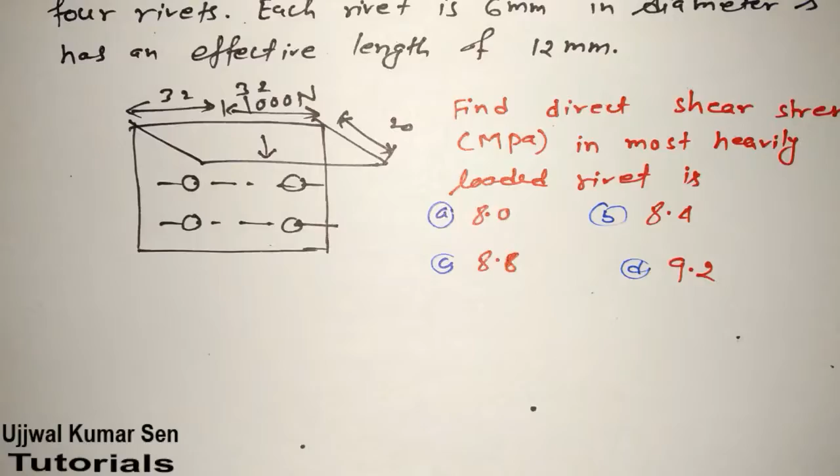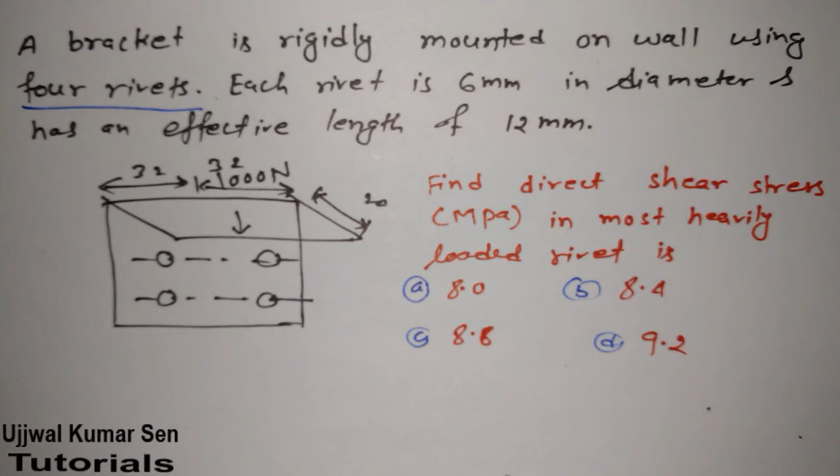This question was already asked in GATE previous year. If you are preparing for GATE or any upcoming examination, riveted joints is one of the important joints in machine design. In welding and machine designing, don't forget to study two topics: riveted joint and fillet joints. Both are very important.

I have already shared videos related to fillet joints, which has also been asked in GATE questions. Now in this tutorial, I'm going to share with you exactly how to solve this question. Let's go for it.

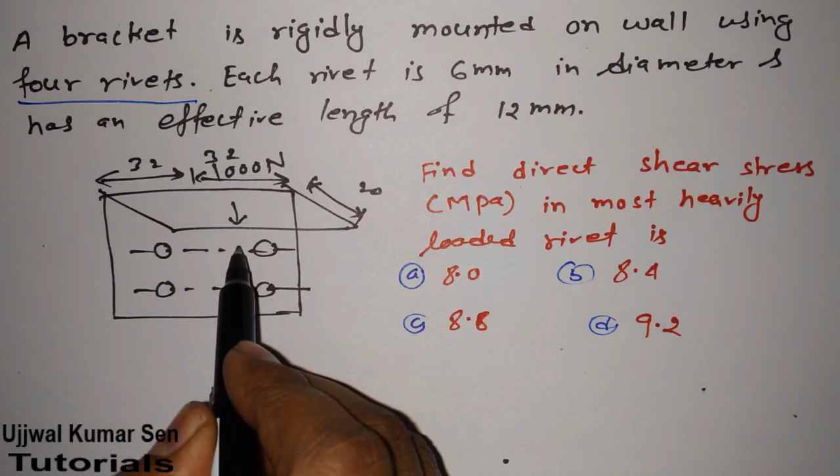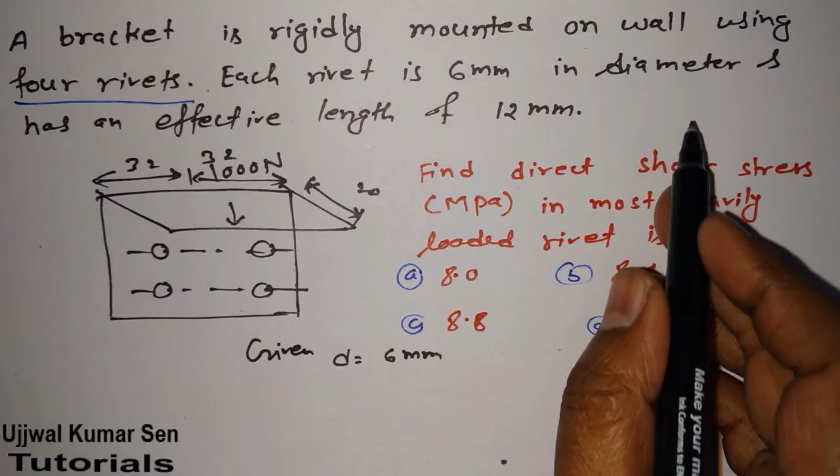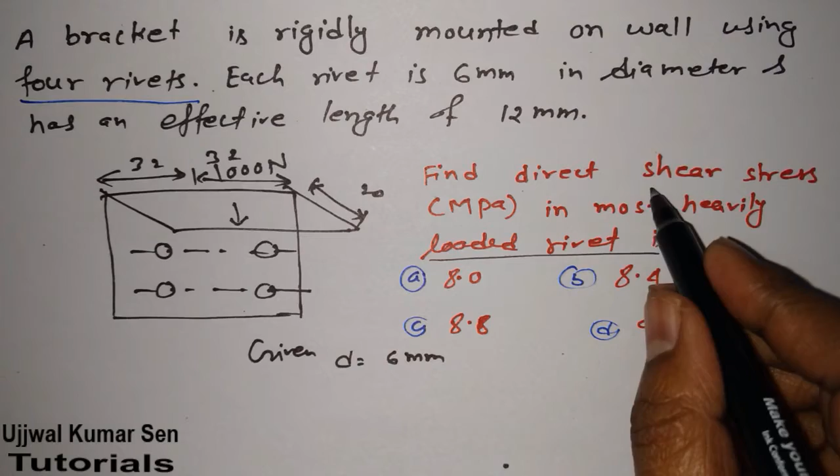Now what they have asked: a bracket is rigidly mounted on a wall using 4 rivets. Suppose this is a bracket mounted on the wall using 4 rivets, and each rivet diameter is 6 mm. We have to find the direct shear stress in the most heavily loaded rivet, in megapascal.

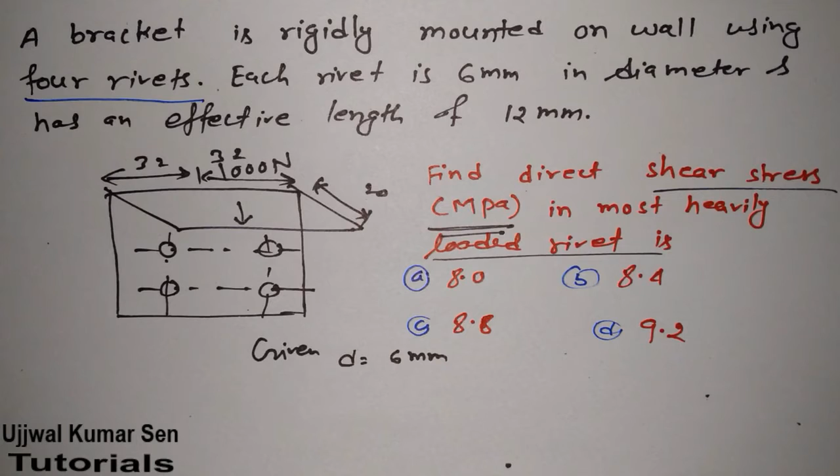Now if we have this combination, that means all these riveted joints are taking the same load, and their dimension is the same, meaning the diameter of the rivet is same. That means all of them have the same shear stress. Are you getting my point? So if I calculate shear stress for one, that gives the most heavily loaded rivet.

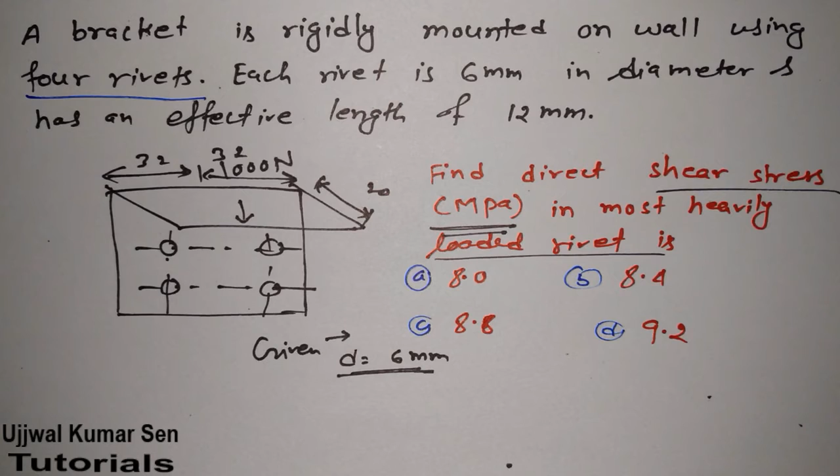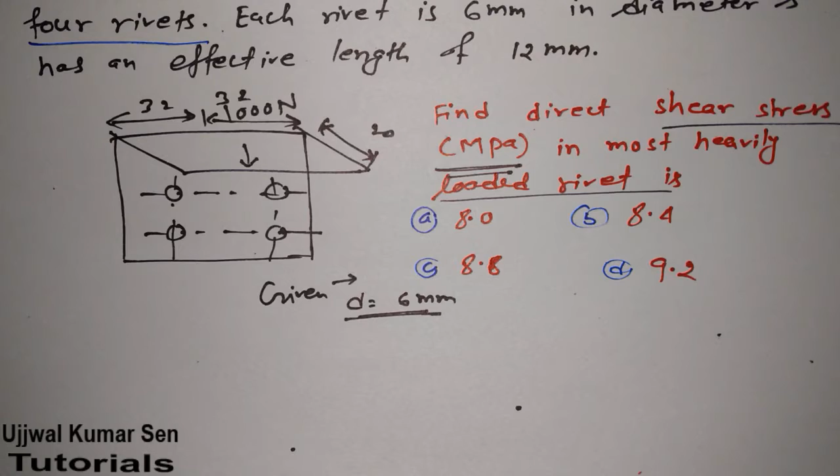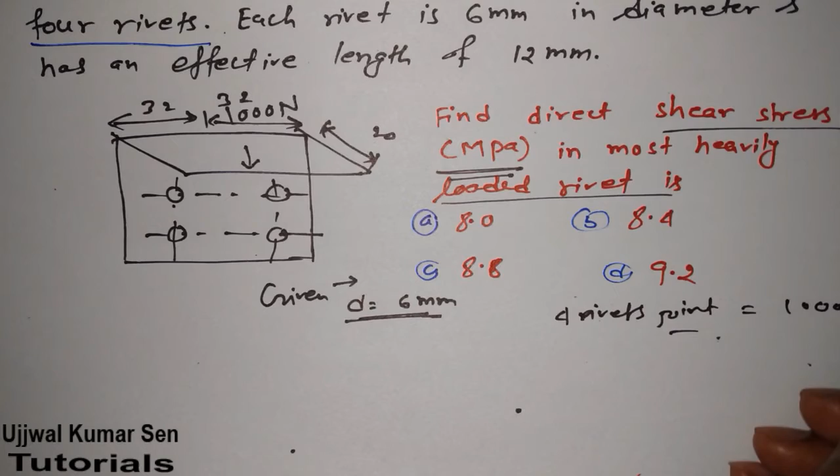Because the total load acting on this wall is 1000 Newton, and we have 4 riveted joints, so total load bearing is 1000 Newton. So each rivet joint's loading capacity, load would be 1000 divided by 4, equal to 250 Newton.

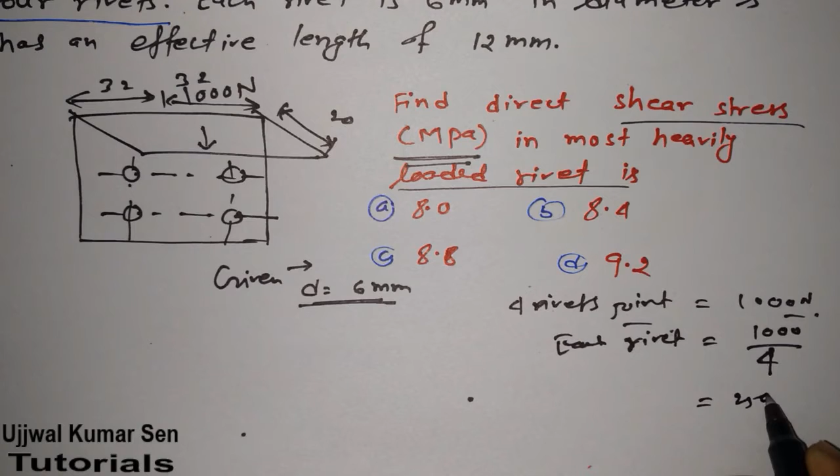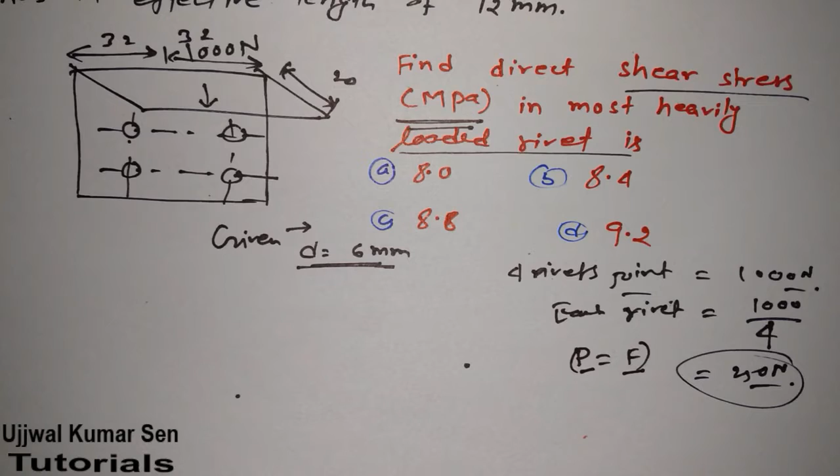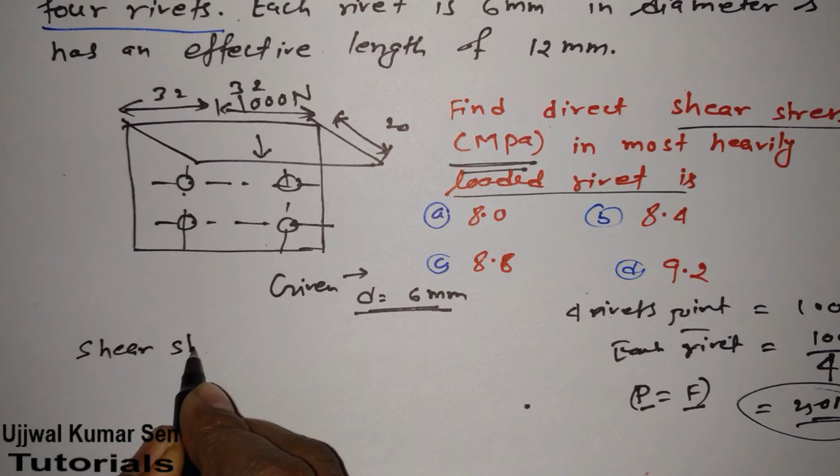Now as you know, what we basically have to find out: 250 Newton we got, that is load, some books denote it by P, some by F. I don't know which book you refer, that's why I'm sharing both. Now if we got load, we can easily find shear stress. Shear stress equals force upon area, so 250 upon area. Now how much area is here?

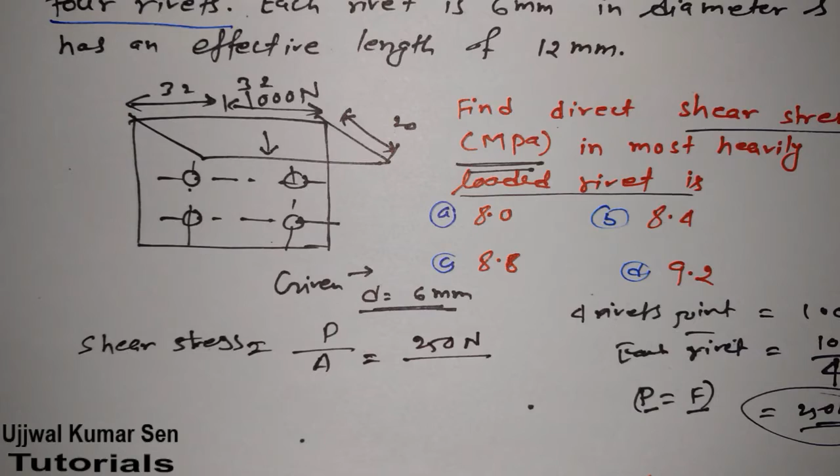Total area would be for a circular section. If diameter of this rivet is 6 mm, area for a circle is pi by 4 d square. We know this. Then we divide force by this area, so 250 divided by pi by 4 multiplied by d square.

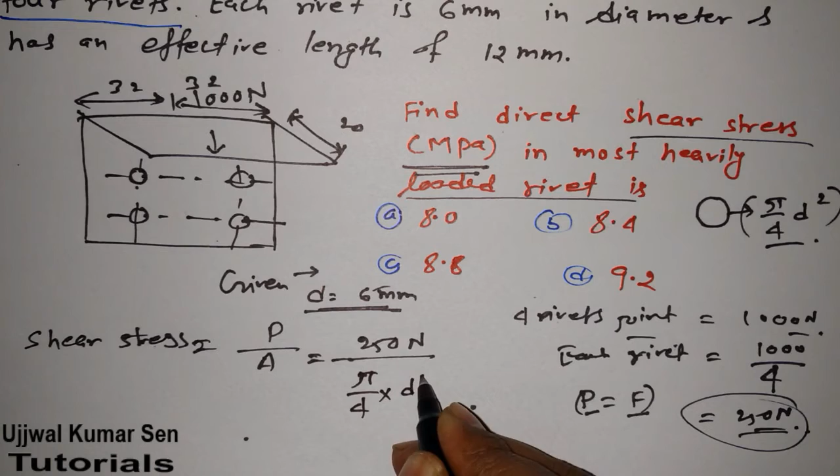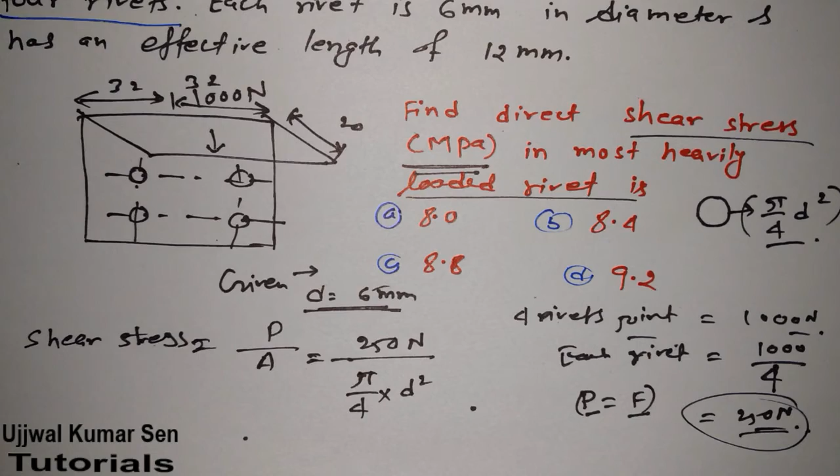This is a simple example of a riveted joint, but in case of riveted joints we can get much tougher questions. This is a simple question, my dear. I will share with you in upcoming videos how to solve those tough questions, which will be helpful for you too. But in this tutorial, I'm sharing this simple question. We'll start from simple and later I'll try to share the difficult ones too.

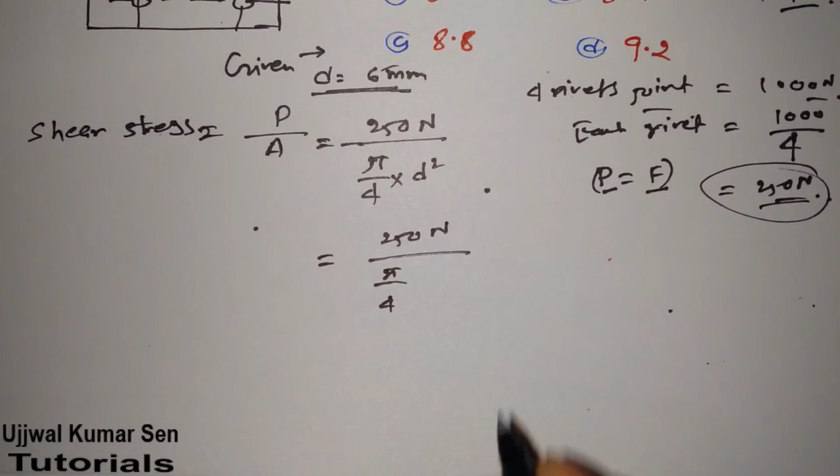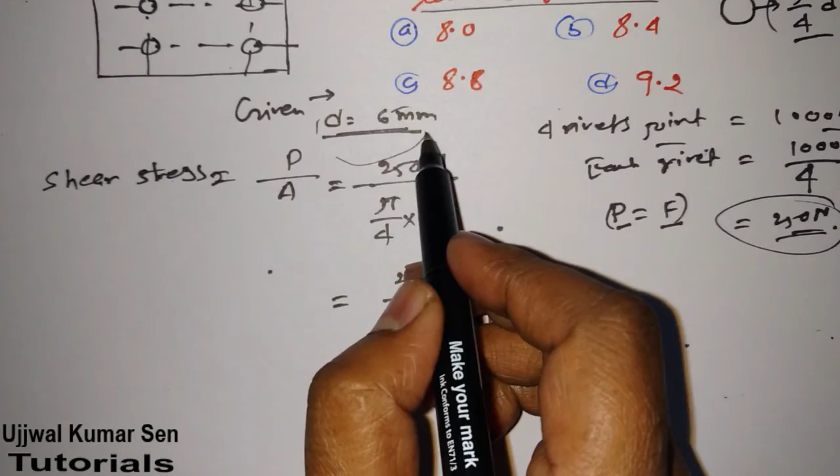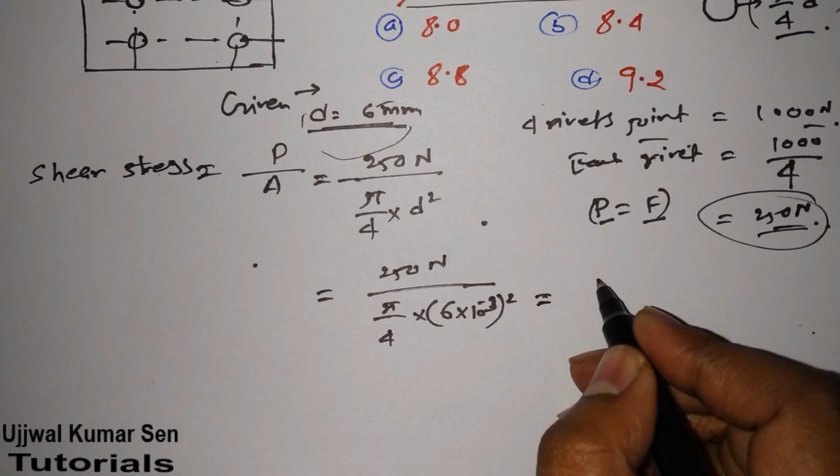So what we got: 250 Newton divided by pi by 4 d square. What is d? Basically 6. Don't just write 6, we have to multiply with 10 to the power minus 3, then square it, because the diameter of this riveted joint is 6 mm each. So this is important. We got 250 multiplied by 4, divided by pi multiplied by 6 multiplied by 10 to the power minus 3 whole square.

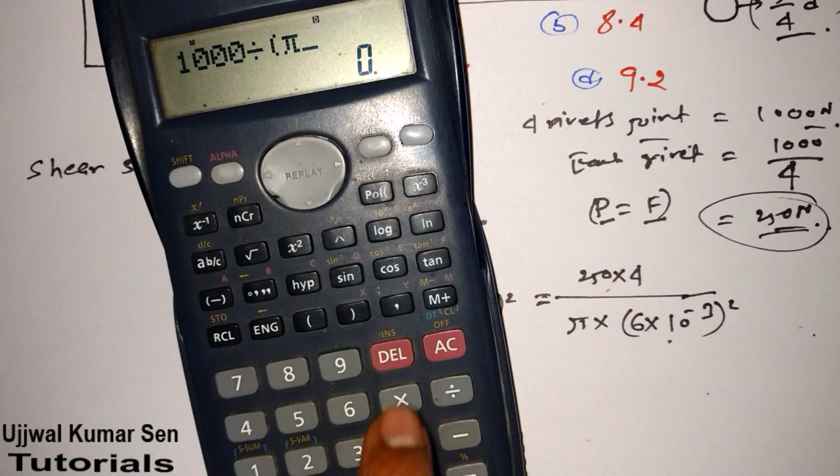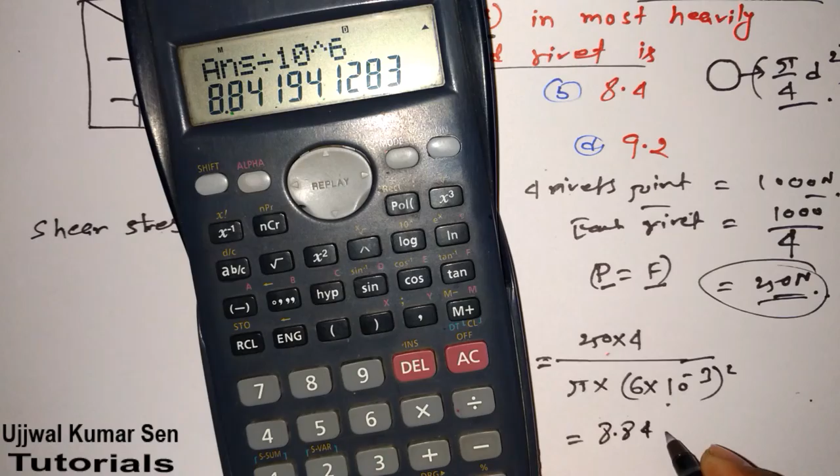So what we got is 1000 divided by pi multiplied by 6 multiplied by 10 to the power minus 3 whole square. Now how much are we getting? We get a value, and the answer has to be in megapascal, so we divide this answer by 10 to the power 6. What exactly are we getting? 8.84 megapascal, since mega means 10 to the power 6.

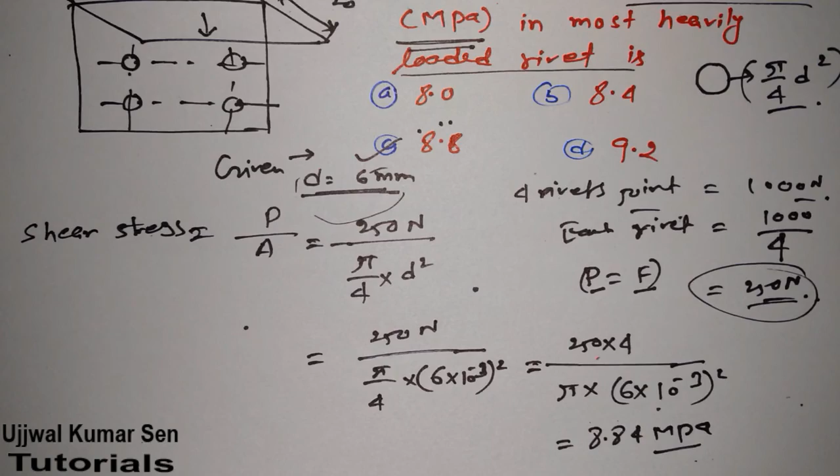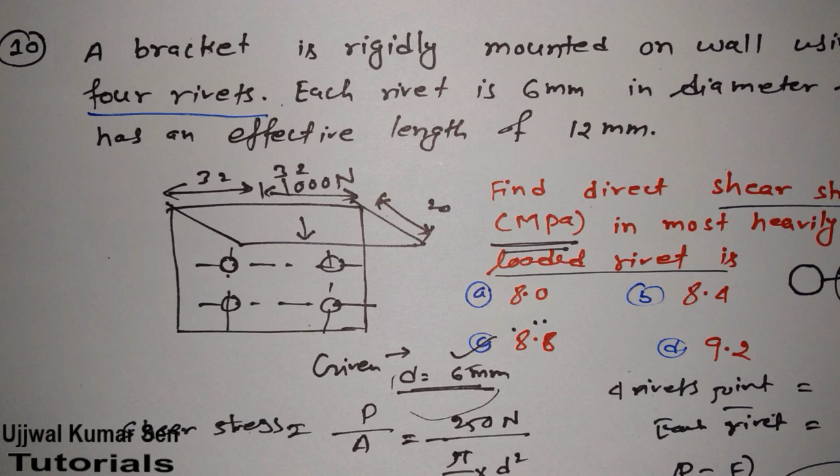Now compare this answer with the given options, that is option C. Option C is the right answer for this question. So in this way you can solve questions related to riveted joints, and of course you will get a little tougher questions in the examination, that is for sure. I hope you understand the question. Thanks for watching, see you soon in my next video tutorial.